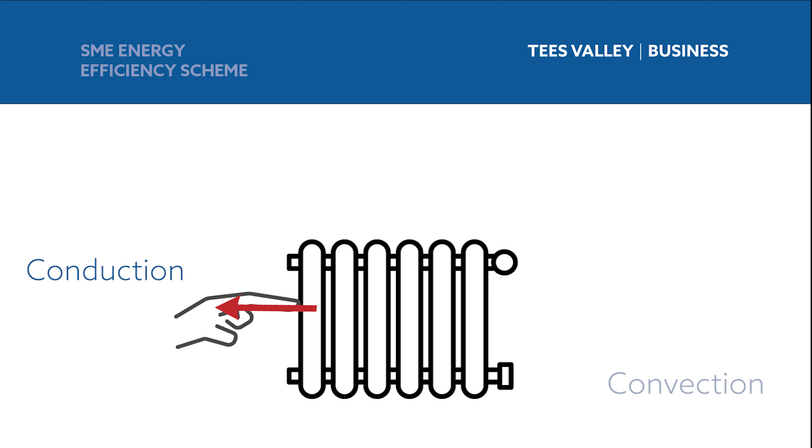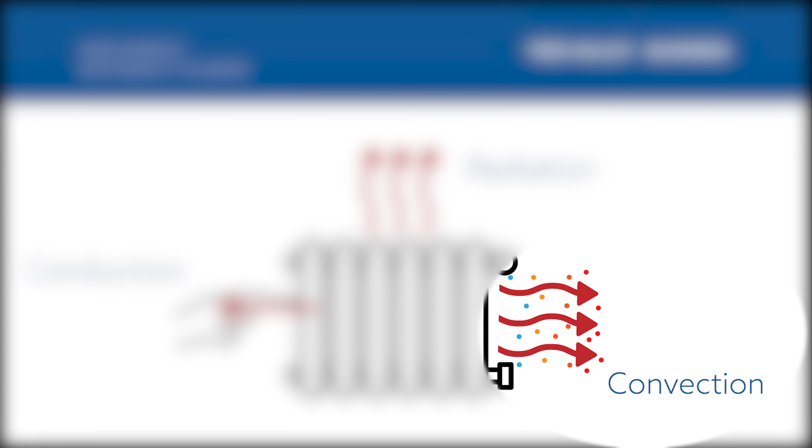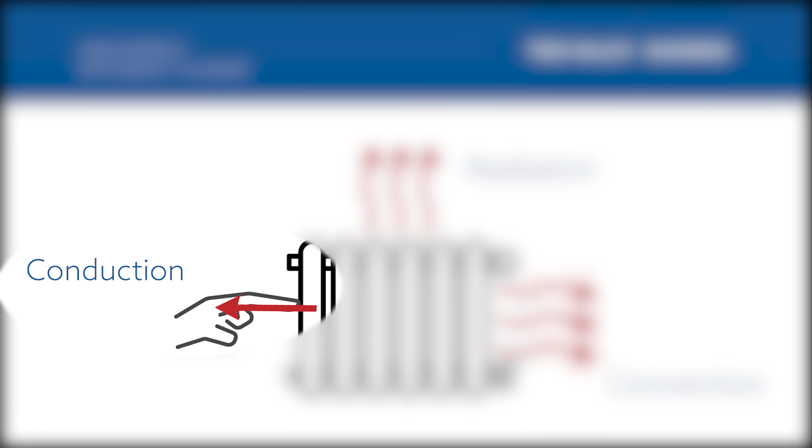Traditional heating systems, which use boilers and radiators, deliver most of their heat to a room by heating the air, which in turn keeps us warm, and this is an example of convection. Although if you placed your hand on a radiator it would feel immediately warm or even painfully hot, which is due to conduction directly from the radiator to your hand.

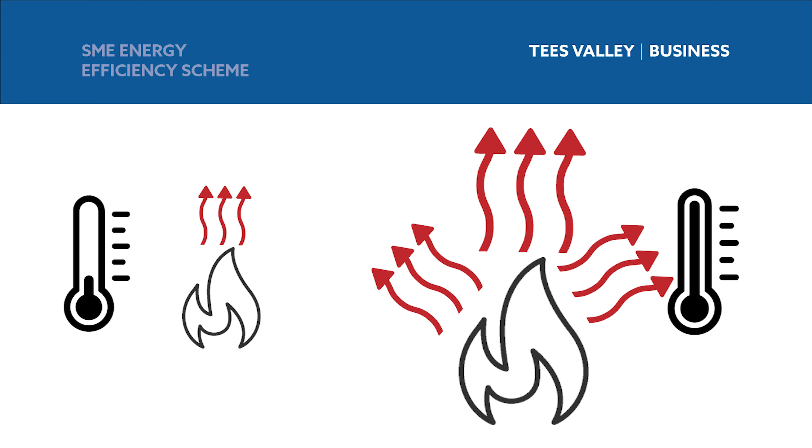Radiation is the transfer of heat in the form of electromagnetic waves. The hotter an object is, the more radiation it emits, and this radiation can be absorbed by some objects, causing them to heat up. This is the process by which the sun's rays heat the earth, or how a campfire can keep people feeling warm even though the air temperature is below freezing.

The radiation that is most useful for heating people is infrared. This is invisible to us as it lies just beyond the red part of the visible light spectrum, but because it's easily absorbed by our skin, we feel its warming effect.

Radiators are probably the most recognisable type of heat emitter, and going by what we've just seen, the name would suggest that they heat rooms via radiation. In reality though, they actually do most of their heating by convection, meaning they have to heat up the air in a room before people feel warm.

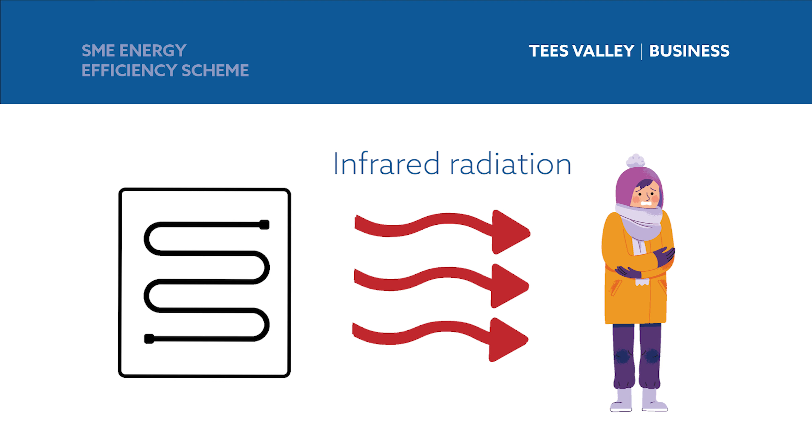True radiant heaters avoid having to heat up all this air, and instead the infrared radiation they emit heats up people and objects directly, potentially from some distance away. They differ in their design from conventional convective heaters by maximising the heat they emit in the form of infrared radiation and limiting what they emit through convection or conduction.

As you may imagine, removing the need to heat the air in a building can save large amounts of energy and shorten the time it takes for people to feel warm. This is especially true if the building is poorly insulated, if it's very drafty, or if doors and windows are open a lot of the time.

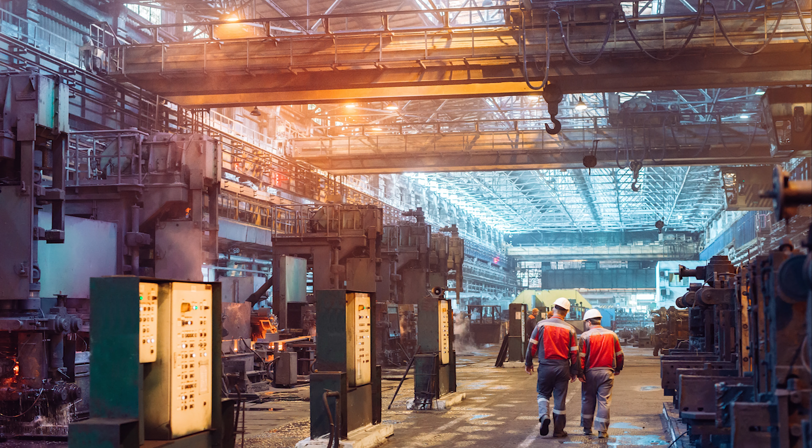Large spaces such as factories, warehouses, sports halls and large retail stores are particularly well suited to radiant heating. In these kinds of space, it's also possible with radiant heating to only heat certain areas where people are working, potentially making further savings possible.

So that explains why radiant heating might be of interest to some businesses who want to save energy. The actual setup though will vary depending on a number of factors, such as which energy sources are available, the building's layout and the materials used to construct it, and also how the space is being used.

So we'll have a look now at some of the main types of radiant heater and how they might be used. There are three main heat sources for radiant heaters: mains gas, electricity or hot water, which is sometimes referred to as hydronic radiant heating.

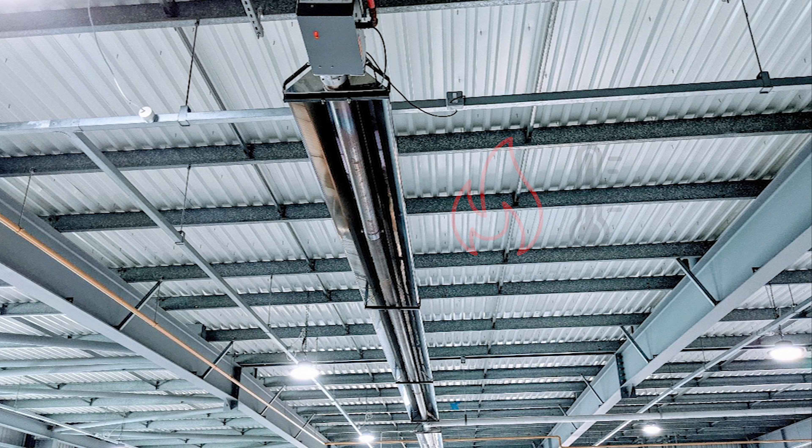In large buildings with high ceilings and low fire risk, gas-fired radiant tube heaters are often the most popular option. These usually take the form of a long blackened metal tube with a polished metal reflector above. Inside the tube, a gas flame is used to raise its surface temperature to a few hundred degrees Celsius.

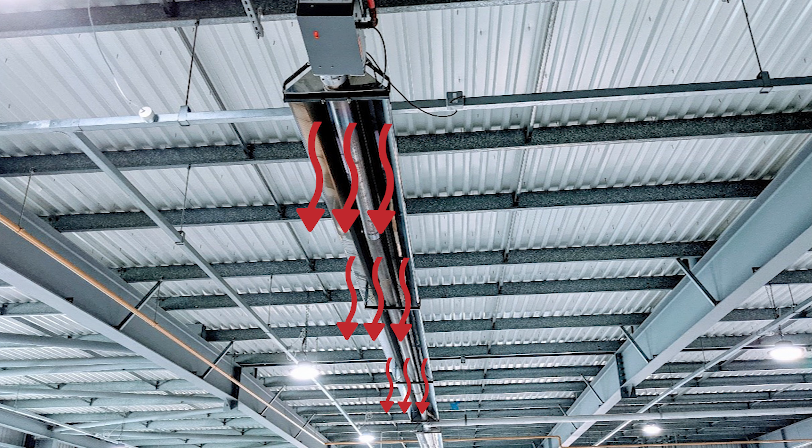The tube's shape and colour ensure that as much of this heat as possible is emitted as infrared radiation, and the reflector surrounding the top side of the tube is used to direct as much of the radiation as possible downwards where it's of most benefit. Gas tube radiant heaters are generally used for heating a large area, but are not as well suited to a more localised use. For heating smaller areas within a larger space, a gas plaque heater may be more suitable.

These take the form of a flat plate or plaque that allows a gas flame to burn evenly across its surface. The plaque heats up and emits infrared and a small amount of visible radiation. The plaque is framed by an aluminium reflector which directs the radiation to where it's needed. These heaters are much smaller and positionable than the tube heaters, so they're better suited to very localised heating of individual workstations.

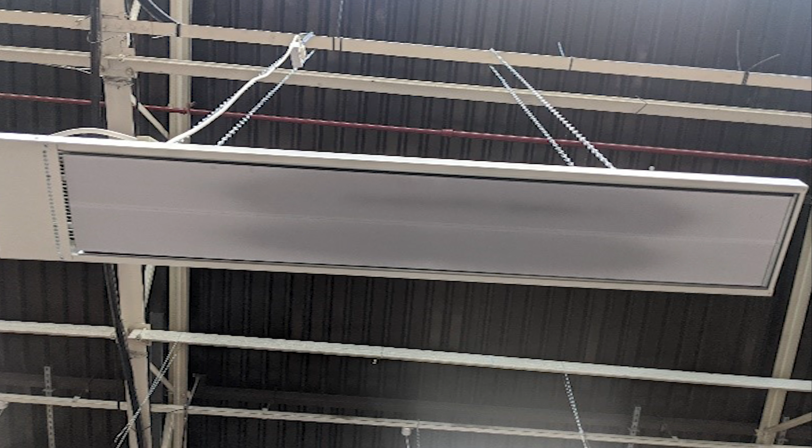Electricity is usually very expensive compared with natural gas, so electric radiant heaters are normally only economical where gas isn't available or it's not safe enough for the location. Some electric radiant heaters emit a bit of visible light as well as infrared, but others, which operate at much lower temperatures, emit nearly all of their energy in the form of infrared.

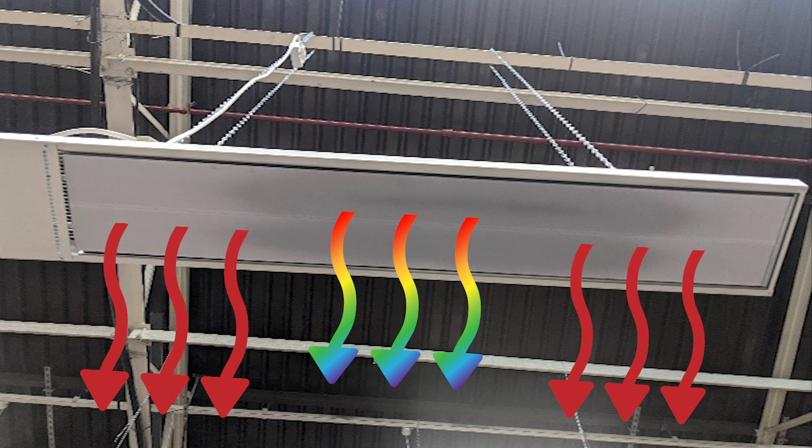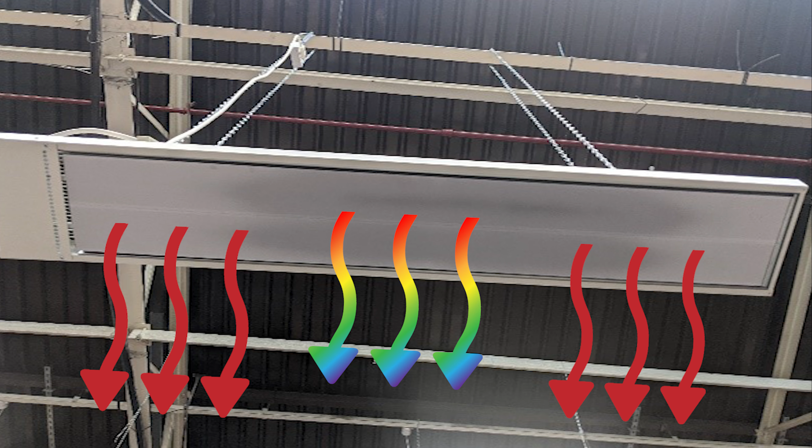Because of the lower temperatures from these, though, they do need to cover a much larger surface area to deliver the same amount of heat. For that reason, the low temperature electric radiant heaters tend to take the form of flat panels, which can either be suspended from the ceiling in the same way as lighting or mounted vertically to walls.

Where direct gas burning radiant heaters are not suitable, but gas is available, there is one way in which gas can still be used for radiant heating. And this is achieved by first generating the heat from gas in an ordinary boiler and then sending the heated water through a series of specially designed flat panels.

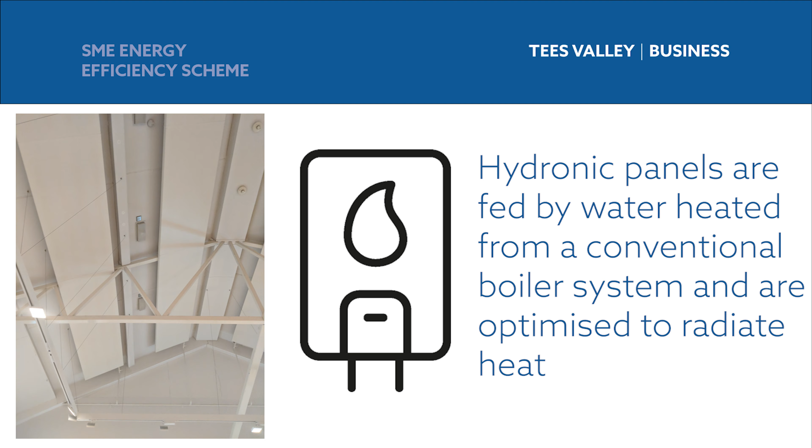These are quite similar in some ways to traditional boiler-fed radiators, but they've been optimised for radiative rather than convective heating. This means that they have a very flat surface on their front and an insulated case on the back, so that the only hot surface is their front face. This ensures that as little convection as possible is allowed to happen and as much radiation as possible is directed forwards.

These heaters have a much lower temperature than the other types of radiant heater, so that makes them safer for spaces with low ceilings or combustible materials nearby. The lower temperature does, however, mean that they usually need to cover a larger area to ensure that sufficient heat is provided.

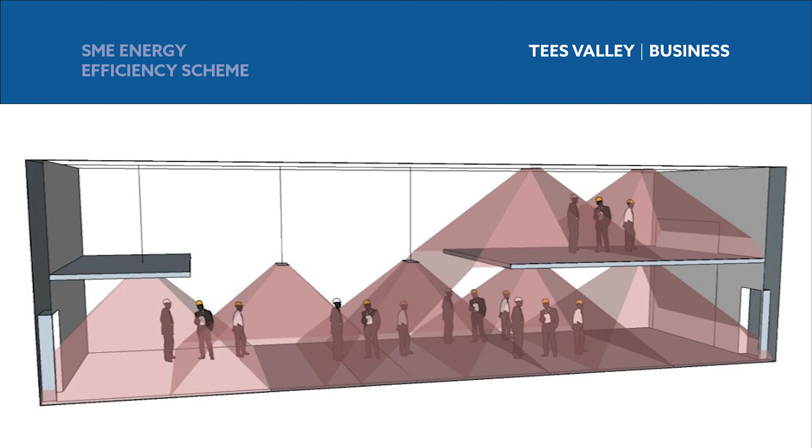Radiant heating design is often closer in its approach to designing a lighting system than a traditional heating system. Just like visible lighting, infrared radiation is emitted from its source in a beam, which as it spreads out becomes less intense with distance from the heater. Heaters therefore have to be of the right power output and spacing to ensure that at the height where people are, the radiation feels warm enough and is evenly distributed.

One disadvantage of these heaters not directly warming the air is that the heat doesn't go around corners. People only benefit properly from it if they have an unobstructed view of one or more of the heaters.

Because of how radiant heaters keep people warm, normal room thermostats, which measure air temperature, are not the most effective way to measure how warm it feels in a room. Instead, a device known as a black bulb thermostat can be used. This looks like a black dome which hides a temperature sensor and allows infrared radiation to pass through. The temperature sensor therefore detects how much infrared radiation is falling on it, which gives an indication of how warm it feels.

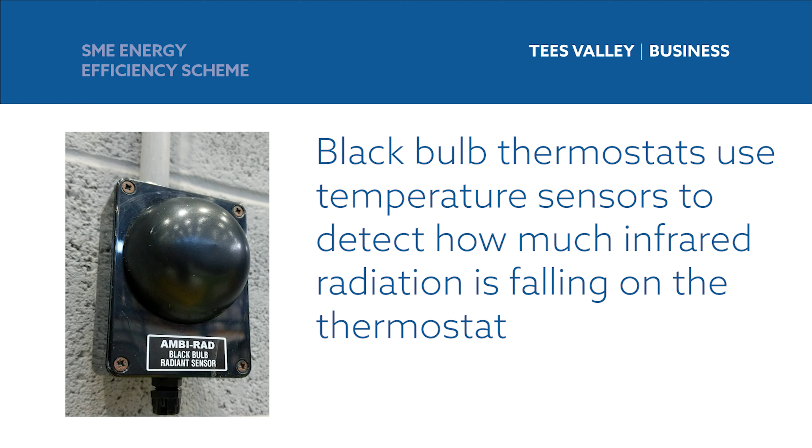In many situations, radiant heating alone is not the best way to keep a space warm. A minimum air temperature might be needed for either occupant comfort or preservation of stock, or simply to keep the building itself warm enough to avoid frost or condensation. So some spaces might benefit from a combination of convective as well as radiant heating.

So as we've seen, radiant heating is particularly well suited to poorly insulated, drafty buildings with high ceilings. But the reverse of that is also true, so it's unlikely that radiant heating will reduce consumption by very much in well-insulated, airtight buildings, and low ceilings tend to prevent radiant heaters from creating a good, uniform coverage, and they can also bring the heaters too close to people or flammable materials.

Radiant heaters, unlike convective systems, don't really turn up or turn down their power output. Instead, they're pretty much just either on or off. And that means that without well-adjusted thermostats and timers, it is possible to quickly overheat a space and waste a large amount of energy.

Manufacturers often quote a very high saving potential from installing their radiant heating products. Independent testing and verification of these savings is not at all common though, so figures quoted by these companies should be treated with a degree of scepticism. It is reasonable though that in a large uninsulated and highly ventilated space a radiant heating system would reduce the kilowatt hours consumption by around 10 to 25%.